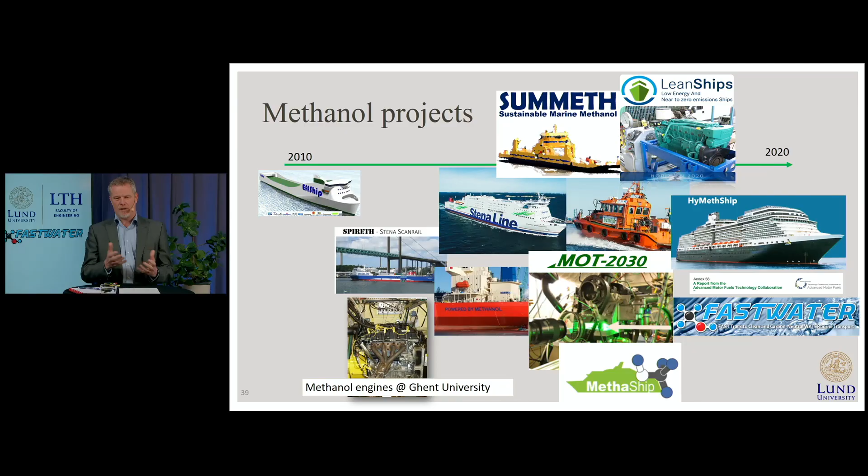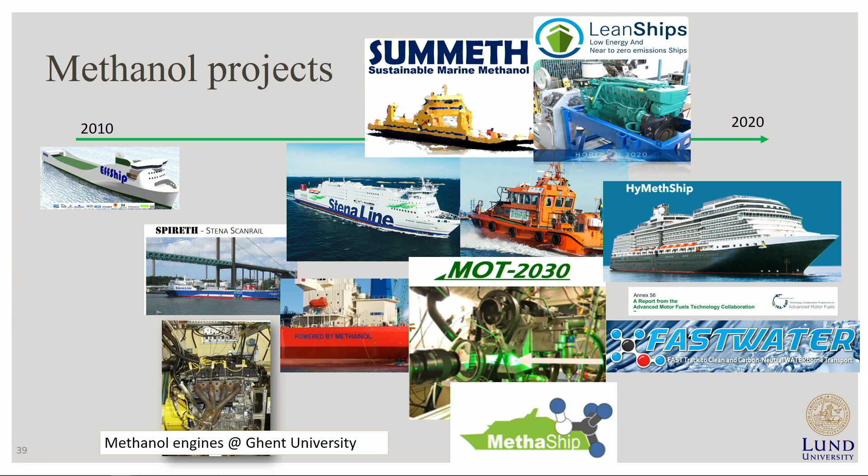As we are aware, the last decade has seen the interest for methanol engines and methanol vessels and transportation increase quite a lot. The slide here shows a number of different projects increasing over the decade. I will not report back from all of these different projects, that would take too much time. So I will focus on the MOT-2030 project, the SUMMETH project, discuss a little bit about the conversion of the Stena Germanica, and some other projects as well.

And this methanol interest is not something that is unique to Sweden. We can see a lot of different activities in many different countries in the world.

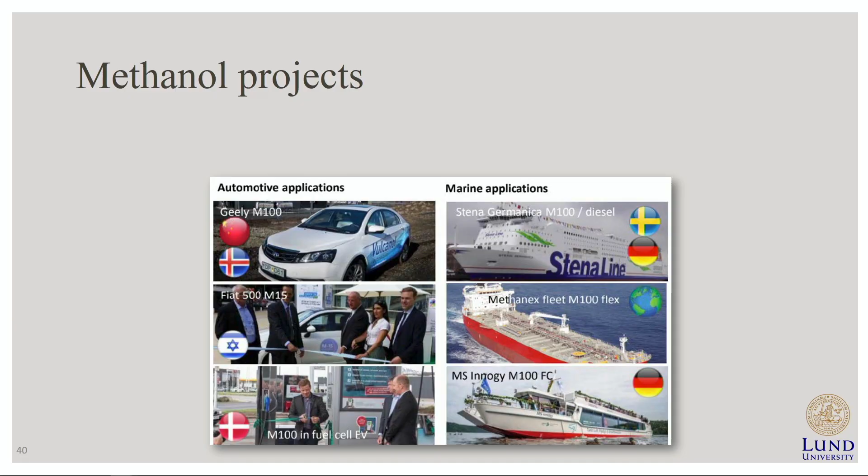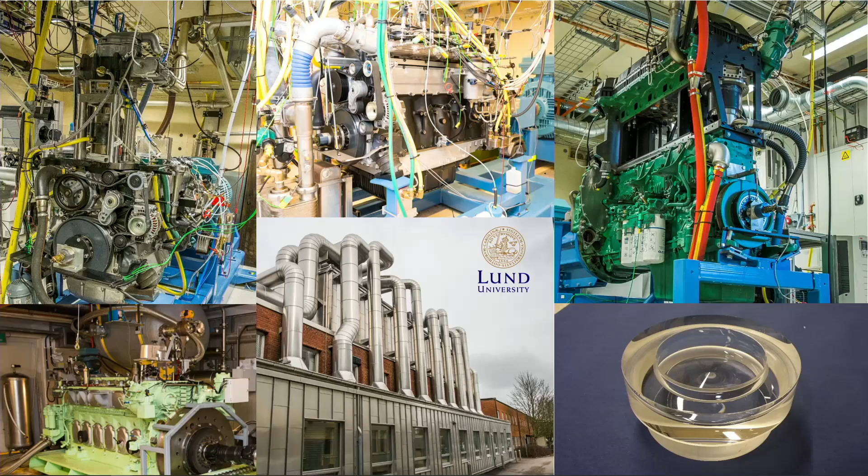I come from Lund University, and the pictures you see here are from our engine laboratory. The center picture shows the outside of that. We have 13 different test cells for engines. To the lower left, you can see a Wärtsilä engine that is placed in our basement, and the other engines you can see in the pictures here are heavy-duty engines from Volvo and Scania. To the lower right side, you can see a glass piston, and that is part of our expertise. We work with looking into the combustion chamber to learn about how the different combustion concepts work, and to develop even more efficient and clean engines. All of these engines you can see in these pictures are available as optical engines.

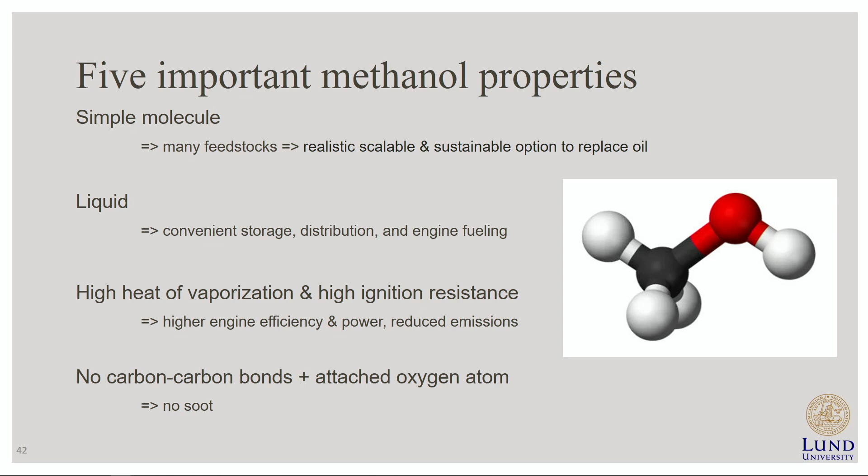There are 5 important methanol properties that I would like you to remember. The first is what Sebastian already touched upon, that it is a simple molecule that allows many different types of feedstocks, and that makes it a realistic, scalable and sustainable option to replace oil. One of the best options, I think. It is liquid, and that makes storage and distribution convenient, but also makes it convenient from an engine perspective with the fueling systems.

There's a high heat of vaporization and high ignition resistance for this fuel, and that can be exploited for higher engine efficiency and higher power, but also to reduce emissions from the engine. And the molecule itself doesn't contain any carbon-carbon bonds, and the attached oxygen atom leads to no soot production at all.

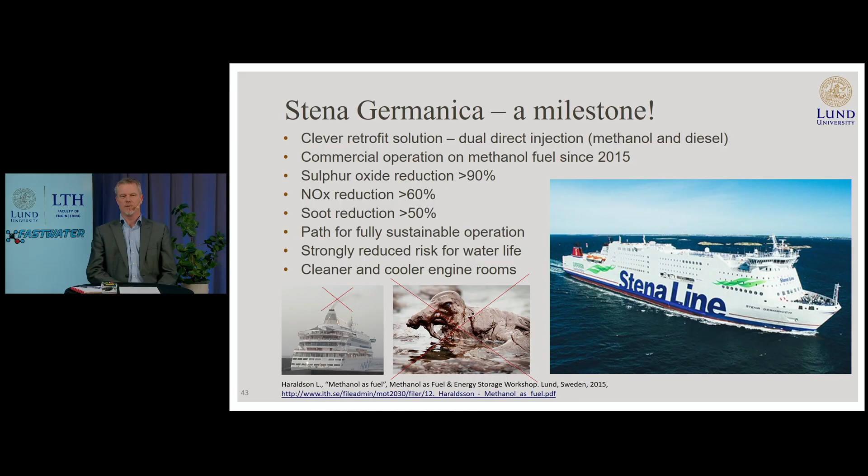For me and for so many others, I think the Stena Germanica is really a milestone, showing the way this is really possible, and it's a very clever retrofit solution. Dual direct injection - you have methanol, and then you have a small pilot injection of diesel to make sure to ignite the methanol fuel. This has been in operation for a couple of years, and there are strong reductions of sulfur oxide emissions, NOx, and soot as well, and it demonstrates a path for fully sustainable operation when the methanol itself is fully sustainable.

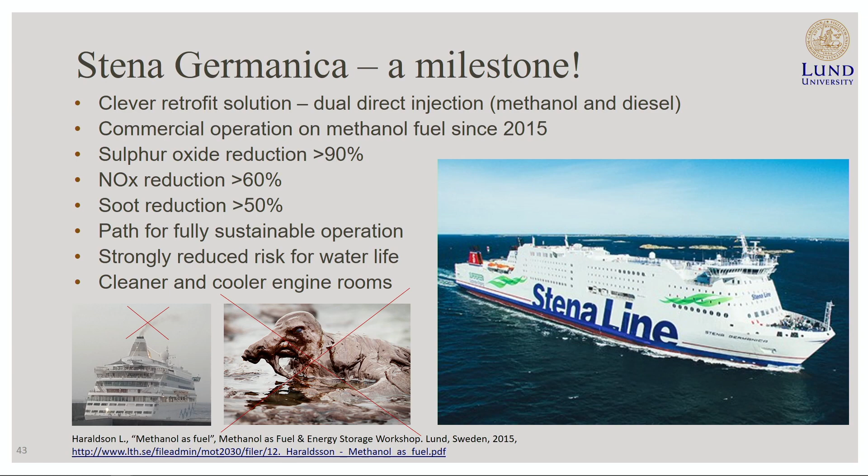There are some other added benefits. From a toxicity perspective, methanol is much better than diesel or gasoline if it comes into water. So there's a largely reduced risk for water life by having methanol.

Another thing that was told to me by the technicians on board Stena Germanica is that it leads to cleaner and cooler engine rooms because you don't need to heat up the heavy fuel oil.

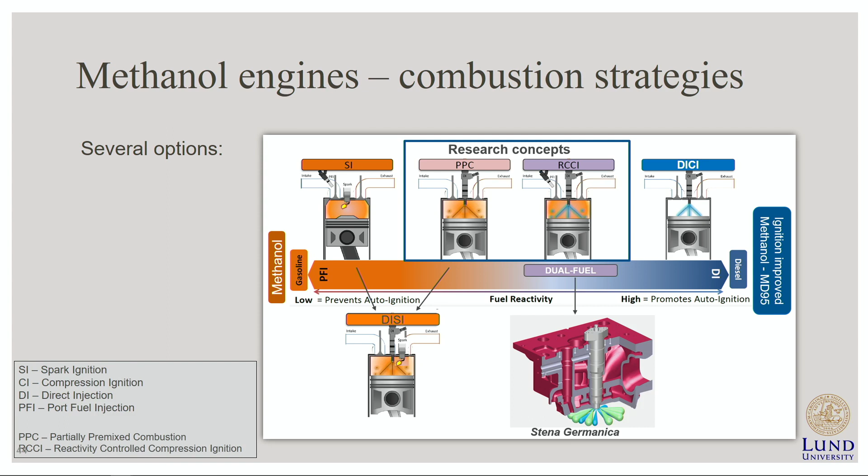There's a number of research concepts we're working with. There's something called RCCI, Reactivity Controlled Compression Ignition, that uses two fuels, for instance methanol and diesel, in different proportions to ensure the highest efficiency and lowest emissions during all working conditions. The hardware requires two different fueling systems, the same hardware used for regular dual fuel engines.

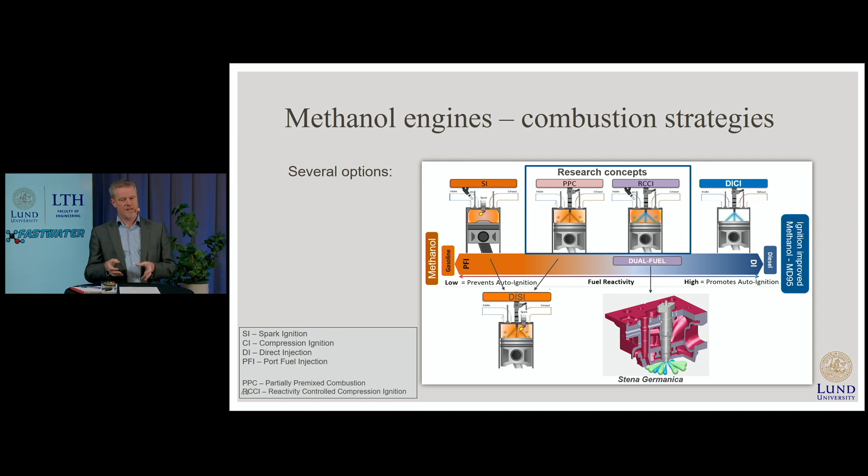But here, Stena Germanica and Wärtsilä were really clever when they implemented this on their already existing Stena Germanica ship. They put all this fuel injection in the same injector, replacing the diesel fuel injector with this dual fuel injector, allowing direct injection of both fuels.

Very clever design. In Lund, we've been working with something called partially premixed combustion that can exploit fuels with lower ignition reactivity. Lean burn, so very efficient. If we combine the PPC with the spark plug, we get something known as DISI, direct injected spark ignited, and if you run that lean, you can also have very high efficiencies and very clean operation.

The SUMMETH project was about conversion of a Swedish road ferry to methanol operation, and that project contained a lot of different activities. I'm not going to report on all of these, but rather focus on the engine activities in that project.

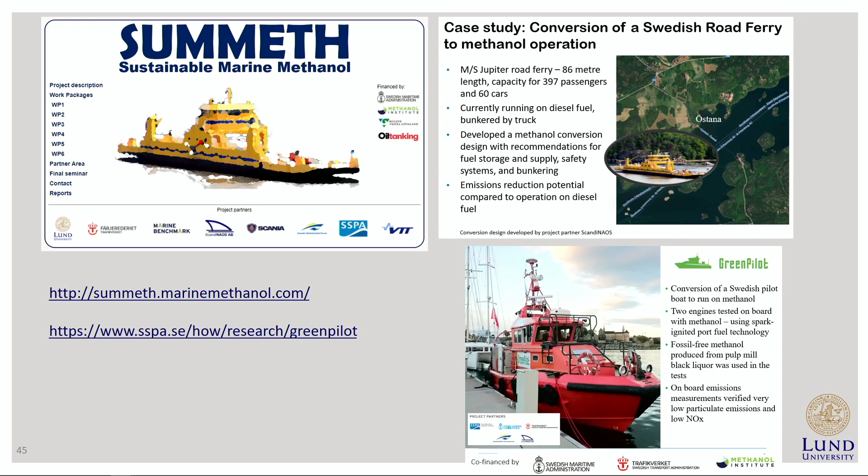Some of the lessons learned in the SUMMETH project were also carried over into the Green Pilot project. I will start with the MD95 concept.

Scania is currently selling trucks using a fuel called ED95, an ethanol-based fuel. That's commercially available—you can buy these trucks. VTT in Finland took such an engine and fed it with a methanol-based fuel, MD95, which is similar to the ethanol-based ED95 fuel.

They reported that these blends were burning clean. There was low aldehyde emissions, particulates are liquid type or originated from the additives and presumably removable by oxidation catalyst. The performance is very similar between MD95 fuel and ED95 fuel, and actually similar to the diesel operation of the base engine. If you want to know more, read a paper by Päivi Aakko-Saksa.

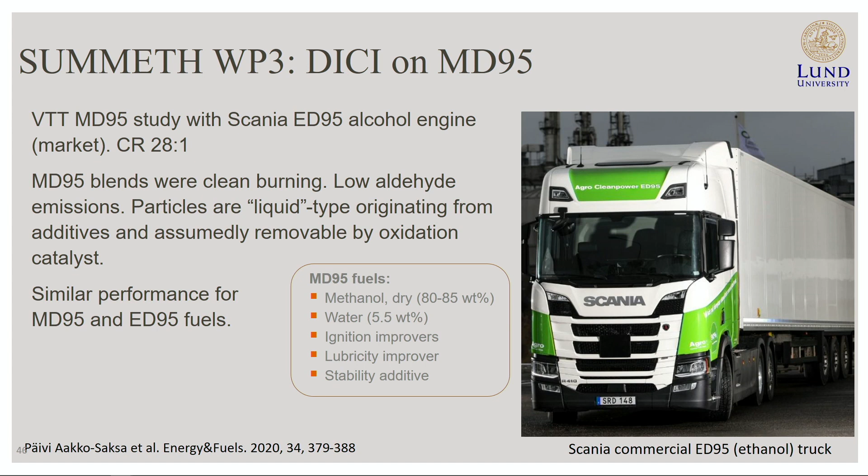And you find the references down low on each of these slides.

ScandiNAOS worked on conversion of a Scania D13 engine, and it was a very clever, great work they did on this conversion—installing spark plugs, installing port fuel injector, PFI, a very simple and well-known technology for gasoline engines and also traditional methanol type engines.

And the results were really encouraging. It complies with present and upcoming EU and IMO regulations without any aftertreatment. The PM is extremely low.

At Lund University, we worked with a more advanced concept—you can see in the picture on the upper right that we had to modify cylinder heads by installing spark plugs and additional injectors. The benefit of direct injection is that we can have higher pressure, and with the spark plug and methanol we had a proof of concept. This system ultimately leads to higher efficiency and lower emissions compared to the PFI SI engine.

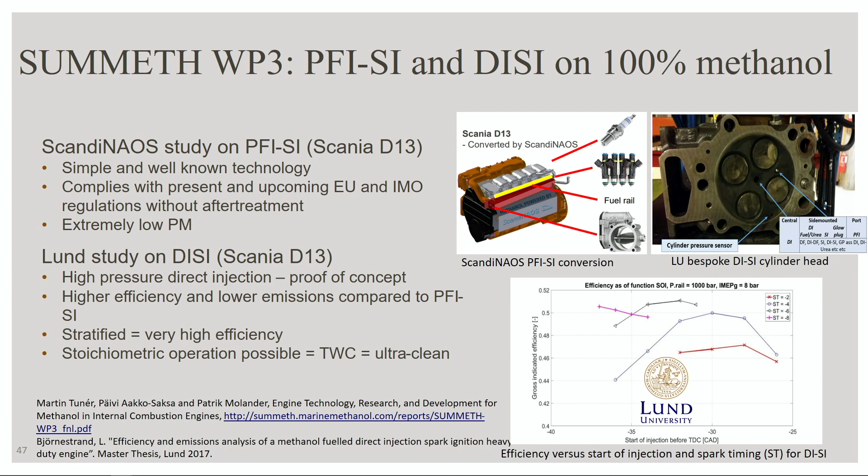You can run it stratified, leading to very high efficiencies, as you can see in the figure to the lower right. Stoichiometric operation is also possible, and you can use a three-way catalyst to achieve really ultra-low emissions.

We've also been working on a project called Sun Fuels, sponsored by KAUST in Saudi Arabia, and Chalmers University, who worked on the RCCI concept, methanol with diesel. You can see the combustion chamber of the Volvo TD13 engine they used in the upper right figure, with two different injectors.

There was a lesson learned about the importance of injector performance and placement from their work. Aalto University focused on direct injection dual fuel, similar to the Stena Germanica and Wärtsilä engine used for that. Very impressive work. They designed a completely new cylinder head, manufactured it, and installed the injectors. Early experiments showed that early fuel injection has advantages for high engine load, combustion stability, and reduced emissions. Great work from them.

At Lund University, we continued the DISI concept using 100% methanol, focusing on strategies for low load operations. Operation down to 1 bar is essentially possible with split injection, using special injection strategies, down to idling conditions. So good results there.

We focused a lot of effort into creating advanced combustion models for the methanol DI-SI conditions. That is what you see in the lower right figure, a subset of six different figures.

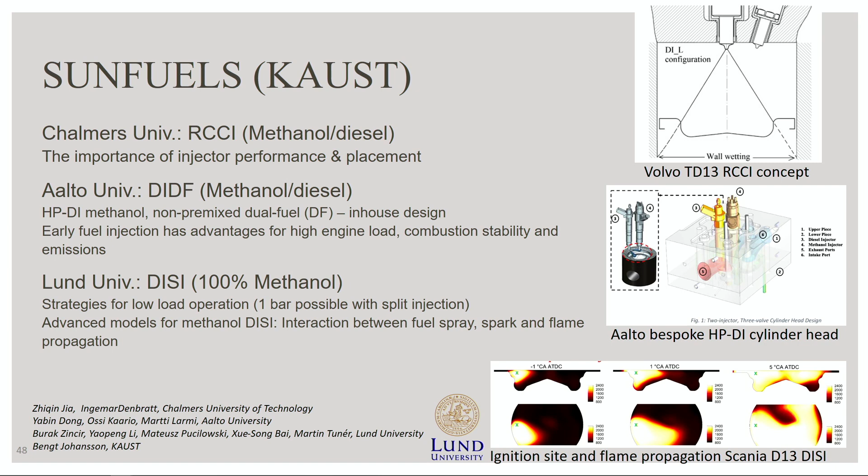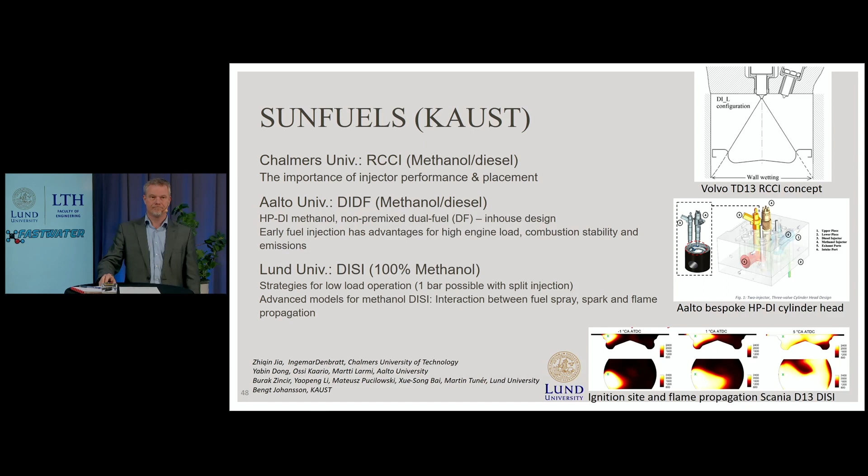These models are very important to explain the complexity of the interaction between fuel spray, spark, and flame propagation. In those figures, you can see the green X, which marks the ignition site, and then how the combustion propagates.

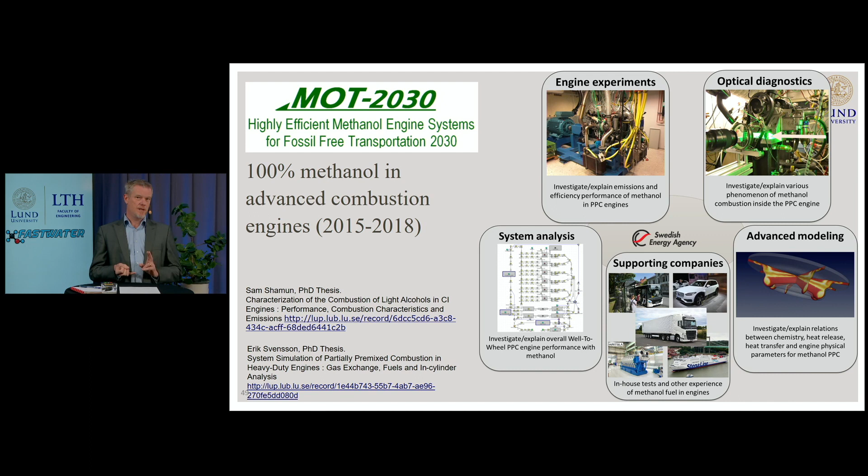In Lund, we also worked on the MOT 2030 project, using 100% methanol in advanced combustion engines. We had four PhD students working on this, doing engine experiments, optical diagnostics, advanced modeling, and system analysis, in close collaboration with companies involved in the project: the Volvo companies, Scania, Stena, and Wärtsilä. I'm not going to present all the results—we produced about 30 scientific papers from this project, but you'll find two thesis references down on the left, and I'll explain some results.

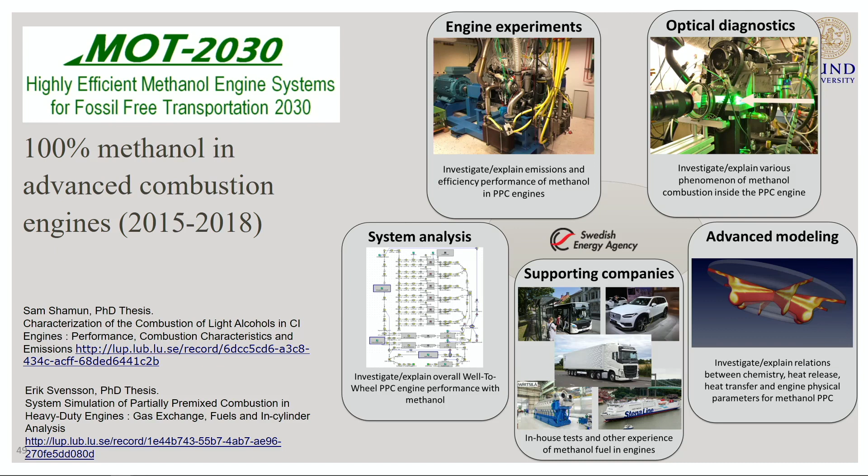Based on the engine experiments, we moved into optical diagnostics, another experimental technology. That type of research is extremely important to explain what actually happens in this very novel type of combustion. We have an advanced combustion concept using a new fuel, methanol, which has not been researched that much.

If you look at the film here, I hope it's working—yes. You can see the fuel sprays coming out, and they behave differently than diesel injection. Then we have combustion ongoing, and we see flame propagation. Looking again, in the upper right corner you can see a sort of dust speck moving about, and bam—there it goes, combustion there.

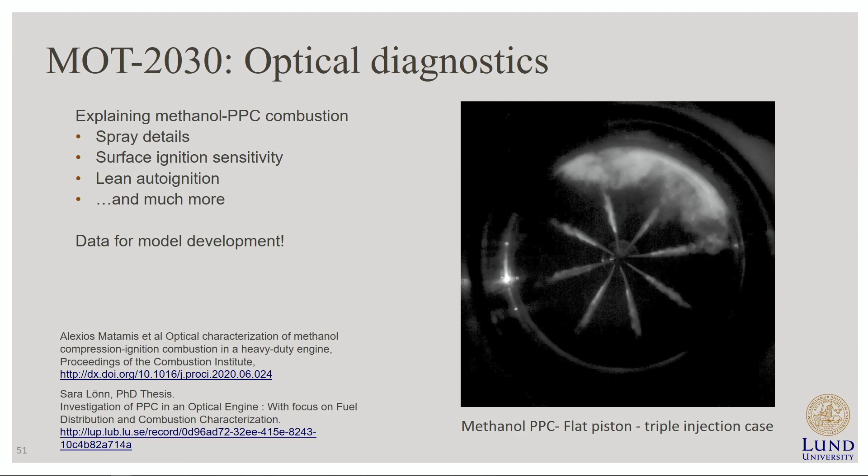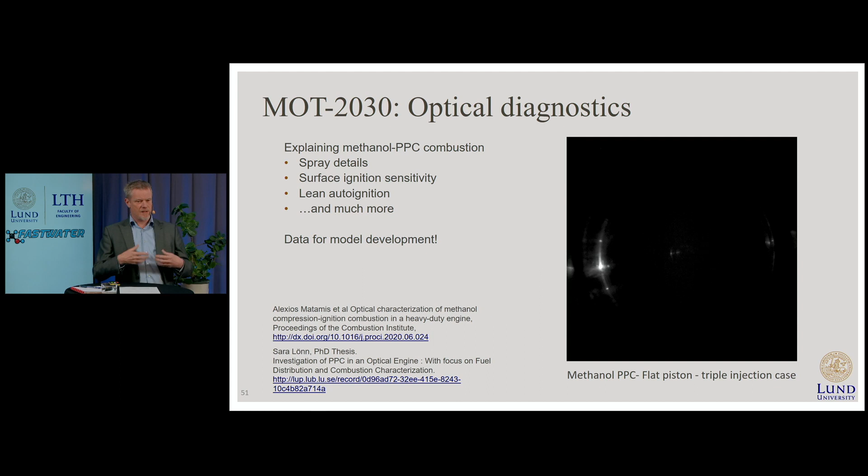That demonstrates the surface ignition sensitivity of methanol, which is a bit special as well. We also learn a lot more about the lean autoignition process and many other things. All of that is so important for the ability to create models of these engines and this type of combustion, which I'll show you now.

Here we see another projection of the combustion chamber, looking from the side. This is known as CFD, advanced modeling. We see the methanol PPC-type combustion here. By using our engine experiments and optical diagnostics, we can tailor and calibrate this model and improve it.

So we learn much more about what's actually happening inside the combustion chamber. For instance, temperature distributions are very hard to measure, but that is fairly easy to calculate if you have calibrated the model properly. And these models are very important for virtual engine development for even higher efficiencies and lower emissions than companies will typically work with.

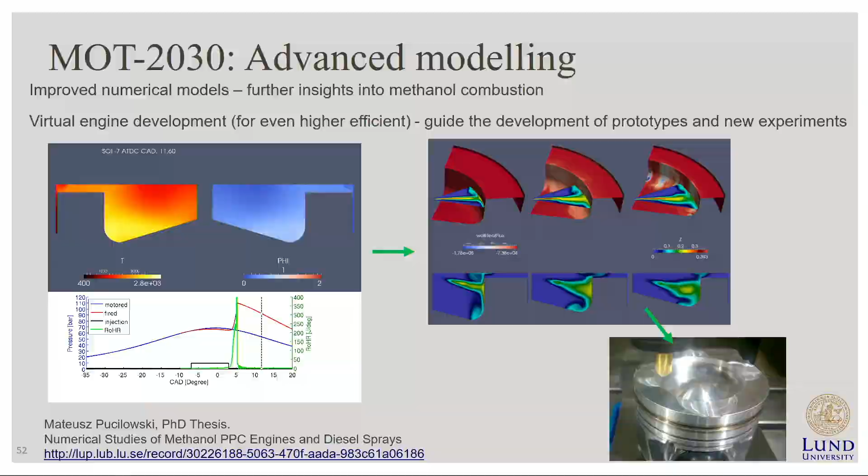The right upper figure is one example of how we made numerical experiments with three different combustion systems for methanol combustion, to see if we can lower heat transfer losses and improve efficiency further. Once we find a good candidate, we can take it down to the workshop, machine new pistons, put it into our experimental facilities, and investigate further if that was a good step or not.

All included, methanol seems to be the cleanest and most efficient fuel we research at our laboratories in Lund. And I believe that methanol's unique properties - high heat of vaporization and ignition resistance - will continue to give an edge over future diesel and gasoline engines.

There are two figures here. The left figure shows the efficiency and the soot emissions. The y-axis has the gross indicated efficiency, the x-axis is the soot emissions. So you want to be in the upper left corner here. The arrow points to the methanol PPC results, the best of those fuels we tried, much better than diesel engines. Ethanol behaves similarly, so there's a good match between methanol and ethanol in this particular case.

On the right figure, we have the hydrocarbon and CO emissions combined on the y-axis, and NOx emissions on the x-axis. It's good to be in the lower left corner within this figure. You can see that methanol PPC gives very, very low emissions, and if you use a three-way catalyst, you can improve it even further. But it's already extremely low emissions.

You can compare that with the SECA limits - you find a green box in the figure - and also an old marine diesel type engine. Looking at dual fuel concepts, they are usually pretty crappy when it comes to hydrocarbon emissions. So this just gives you an idea of how good it's possible to operate with methanol in combustion engines.

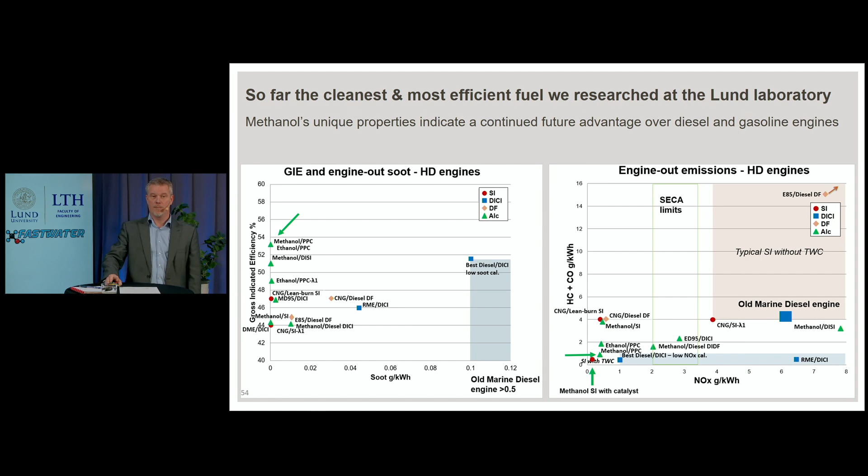So coming to the summary - needs and opportunities. Methanol engines are already in use and demonstrate high efficiency and low emissions. There's clearly potential for exceptional efficiencies, and we have hardly scratched the surface.

The needs, as we see it: we need robust fueling systems and dedicated injectors for the different combustion strategies for methanol operation. We need a lot of further research and development, for instance into the opportunities of dedicated methanol engines with very high efficiency, flex fuel engines that can operate on ethanol and methanol, and also the retrofit kits that Sebastian has already mentioned.

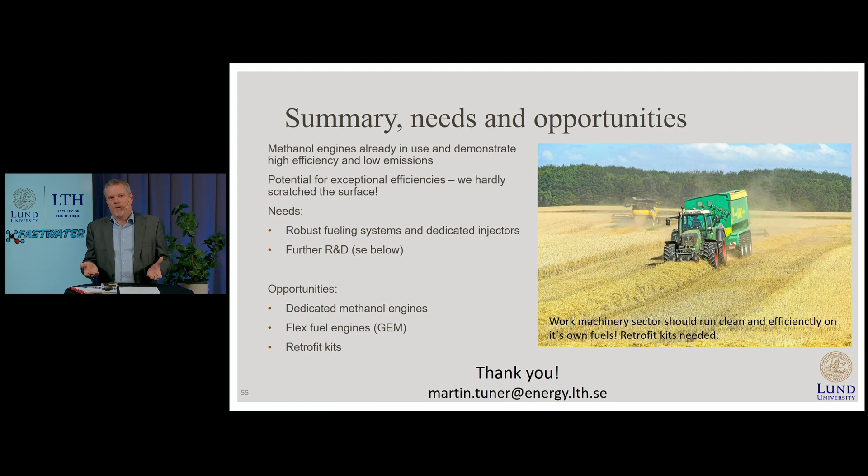And I would like to point to the right figure here at the work machinery sector or the agriculture machinery sector. Obviously those should run on the waste from their own produce, clean and efficiently. So we have a great opportunity in that particular sector as I see it.

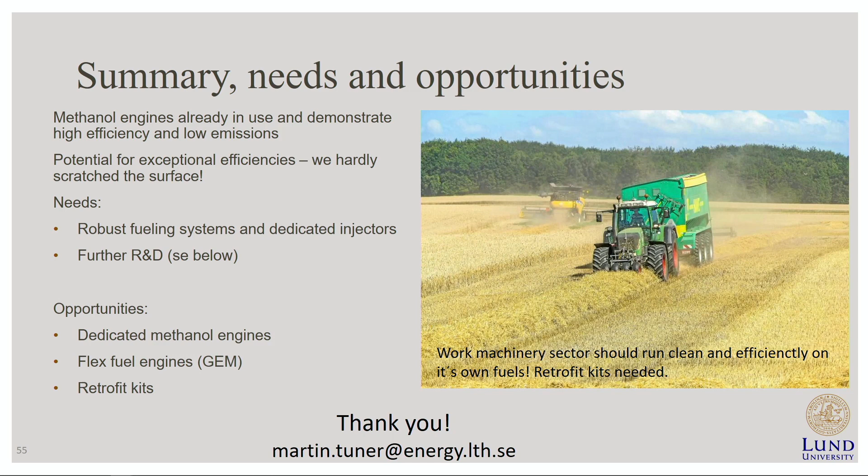Thank you, Martin. So let's see what we have in terms of questions. So a question on the MD95 concept, where the question is on the effect of the ignition improver - adding in this 5% of ignition improver, do you know how it affects emissions like soot and formaldehyde?

Yeah, that's an important and good question. When the methanol, the 100% neat methanol, that reduces soot altogether. But when it comes to adding ignition improvers or other types of additives, they introduce a risk for increasing the soot emissions from the engine. So that's a trade-off we have to deal with in that particular case. Regarding the formaldehyde emissions, that doesn't seem to be an issue with the MD95 concept. Yeah. Thanks.

We have another question concerning the longevity of the engine. So any ideas on engine wear and tear when it has run a number of hours on methanol? Do you see differences in terms of abrasive particles that would decrease the durability of the engines, or the opposite?

I think that's also a very important and valid question. If you go back some time in history, when we were using spark-ignited engines with carburetors and methanol, you could form formic acid in the combustion chamber from remaining fuel residues when the engine cooled down, and that could lead to corrosion in the engine. This is not an issue with modern engine technology and controls, especially with direct injected engines. Regarding abrasiveness, methanol is a so-called dry fuel, so you need some sort of lubricative additive for the combustion chamber.

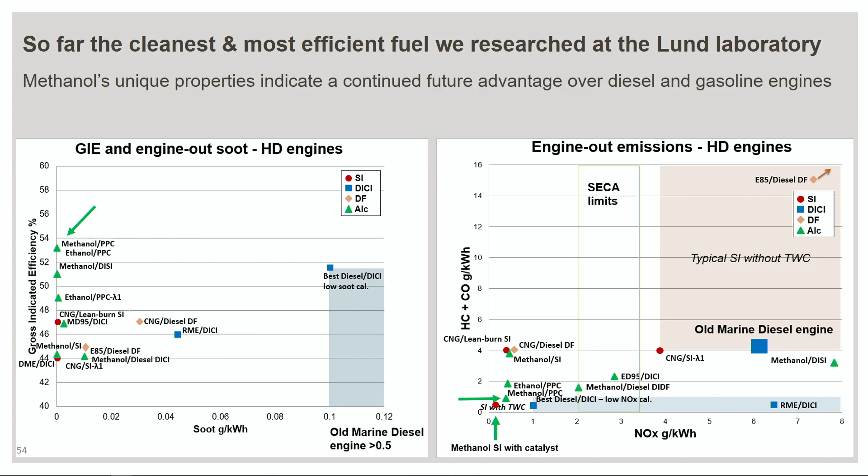Maybe one quick final one, because I think it's an important one. Methanol—is that now soot-free? In the sense, could you run a methanol engine for Euro 6 road transport and get away without a particle filter? Would that be feasible?

There was a figure that I didn't show, but I will include it in the slides that we'll distribute after this day. According to what we've seen in our laboratory, soot is not really a problem at all. So from that perspective, with the current regulations, it's Euro 6 compliant. But we do see small particulates originate—they are liquid core particles. They look really funny, we've filmed them, we have photos, 20 nanometers in size. They originate from the lubricating oil, in terms of the calcium, sulfur, and things like that in the oil. Very small amounts, but large numbers of these particles. But that's also because we're using a diesel engine base, and the piston rings are really not adapted for that type of operation. So I think it's a technical problem that can be relatively easily solved.